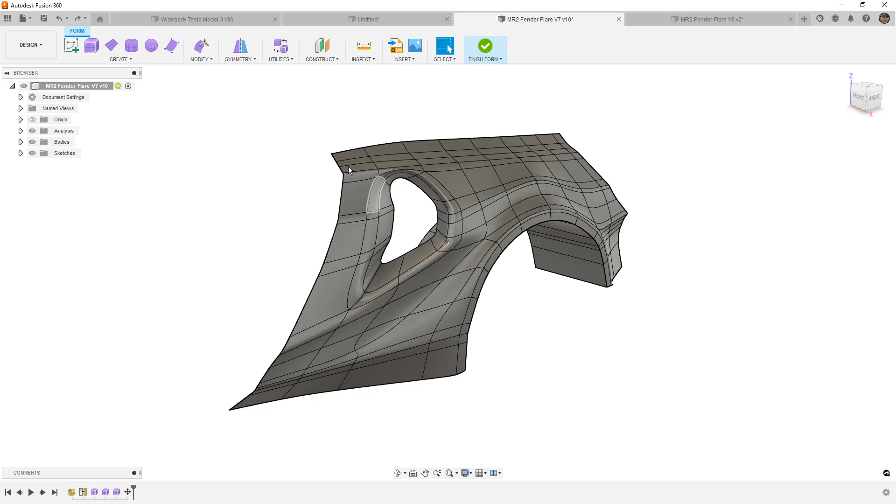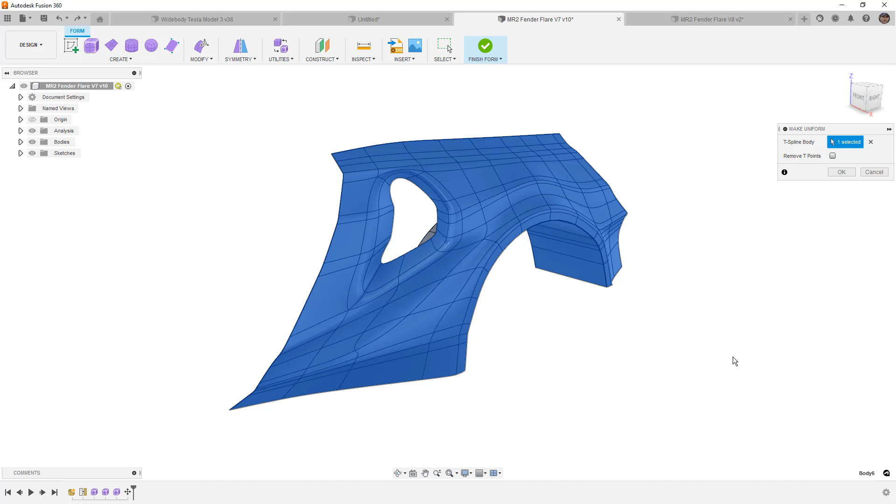Now, the Make Uniform tool, and again, we're going to be prompted to upgrade a T-spline body on all of your designs because there is new functionality. It's just how it goes with these designs. But with this T-spline functionality, when we use Make Uniform, it's taking our smooth body and it's trying to relax some of those areas where the edges are close together, and we might have additional tension in those areas. And what it does is it takes the smooth display and it makes it a little bit closer to our underlying box display. Now, I'm going to hit cancel on this just so we can take a quick look.

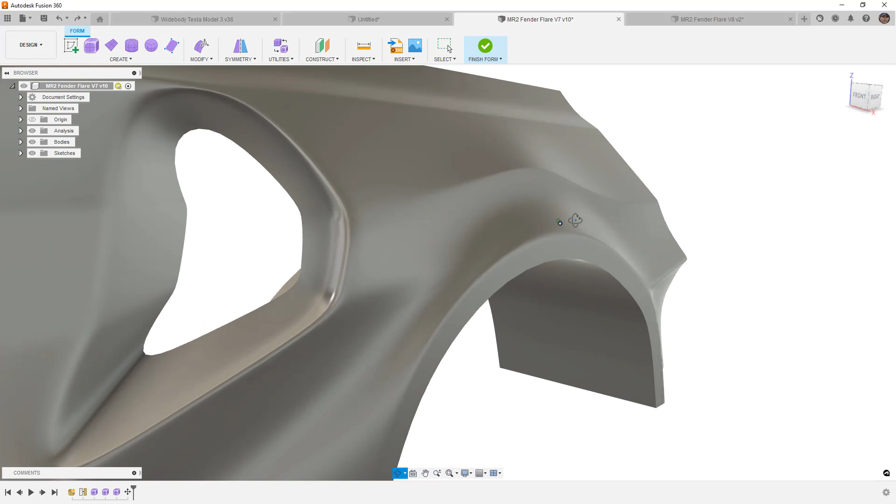When we take a look at the smooth display, you can see that these edges are relatively far apart. When we go into our box display, you can see they're closer together. Now, they're closer together because we're driving that edge. We want a crease in this design. It's not a hard crease, but we want that edge that we have in the design. When we use things like Make Uniform, what's going to happen is we're going to get this to relax a little bit.

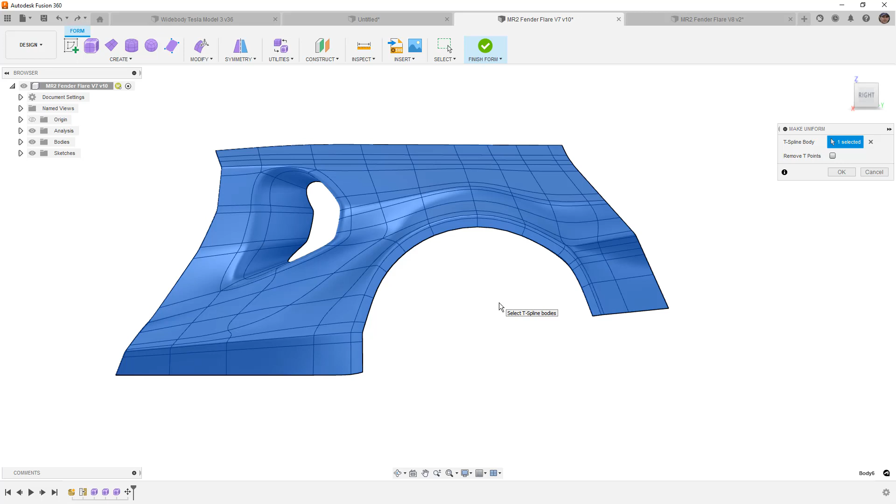Now, they added this remove T-points option in Make Uniform, and I'm not entirely sure that this is a good thing. And the reason for that is because most designs will have multiple T-points. Now, this design specifically only has one, and that was an intentional T-point because I wanted to help control the edge of this flare, but I also wanted to have this crease that sort of went away from that flare in the back. Now, the reason I don't necessarily think that this is a good thing is because it's all or nothing. If you have multiple T-points in a design, you are removing them all or you are leaving them all in the design. And I'll show you what that looks like here.

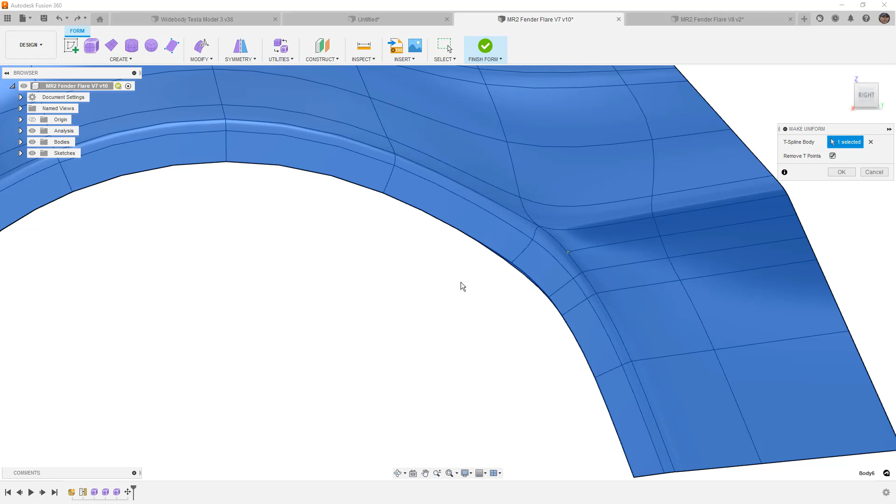So I'm going to use Control and 4 to hide my edges. And I want to note that we've got this flat fender lip, and then we've got this crease that sort of comes off, but it's almost fading away into it.

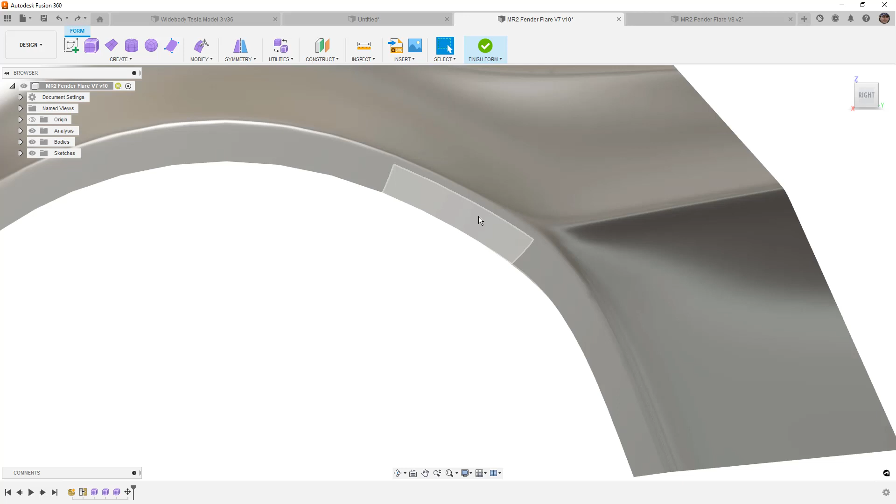When we take a look at this, what ends up happening is that T point gets converted to a star point, and that star point actually does change the way in which that geometry ends. What that means is that we can't really tell until we convert it, until we go through the process. The reason I don't necessarily think this is a good thing is because that functionality was already there in repair body.

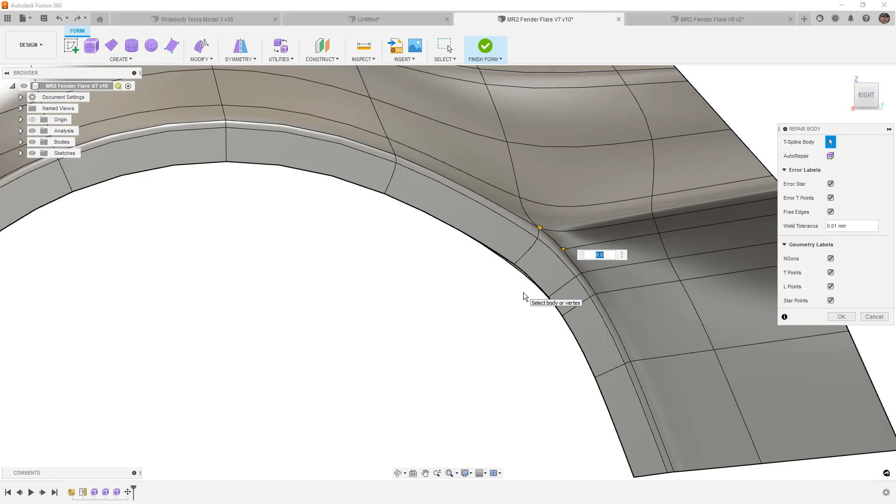If we use repair body, we have a T point here. We can click and turn it into a star point or turn it back into a T point. I think this is a better option because we can see the change in the design on the screen without having to go through the process of converting it.

So when it's a T point, you can see that this crease sort of disappears before it gets to this lip. When we convert it to a star point, it fades this edge away. So it's tight up here, it's tight down here, and it sort of disappears here.

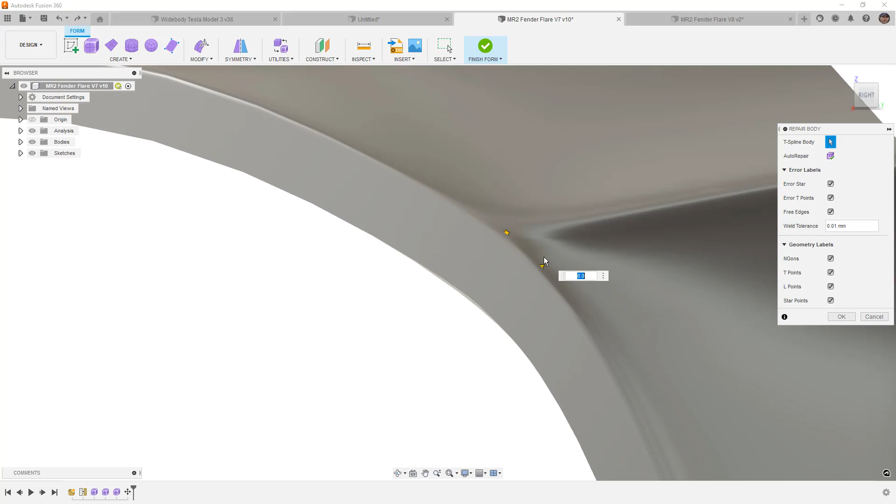Now if the design happened to have multiple T points on it, for example the fender that we did in the video series, if I go to repair body and take a look at these, again we have to convert it. It's just part of the process when we have new functionality. This design has two T points.

It's got one where this crease ends at this edge. Now this is actually a creased edge in this design. It doesn't have a smooth transition, but we also have the same thing underneath.

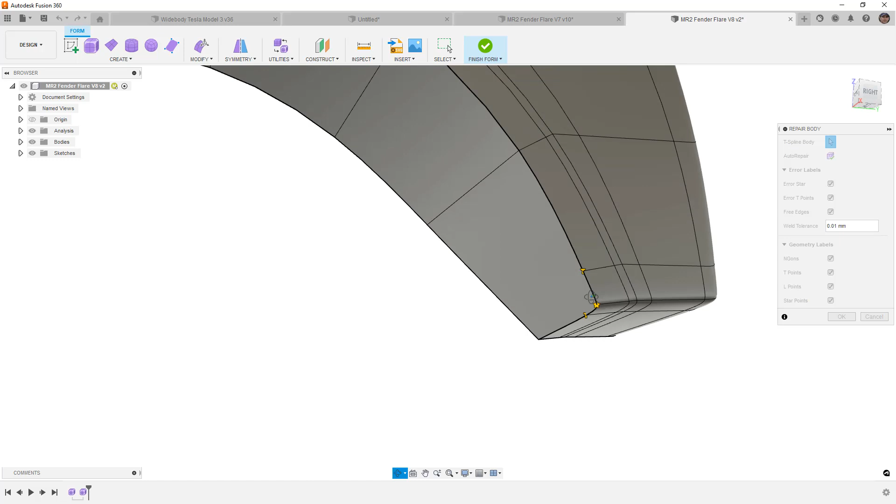Now if we click on each of these, it is going to have an effect on the overall design. That may be okay, that may not be okay. But if we're using the utilities make uniform, it is all or nothing with those T points. We're going to have to convert both of them.

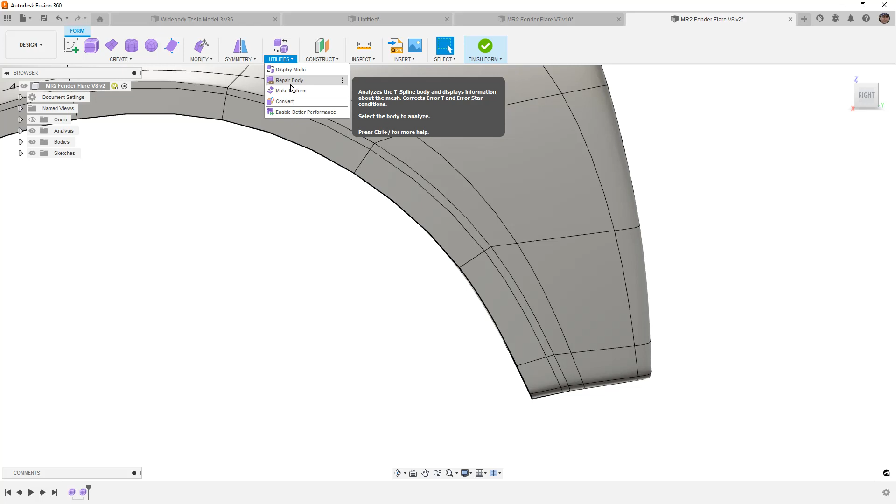Now it's not exactly a one-to-one thing. It's not identical using repair body and make uniform. The reason for that is because make uniform also relaxes the form a little bit. Remember, it's taking out some of that tension. So you don't actually get the exact same result through both tools. You'll have to play around with it and decide whether or not it works for you.

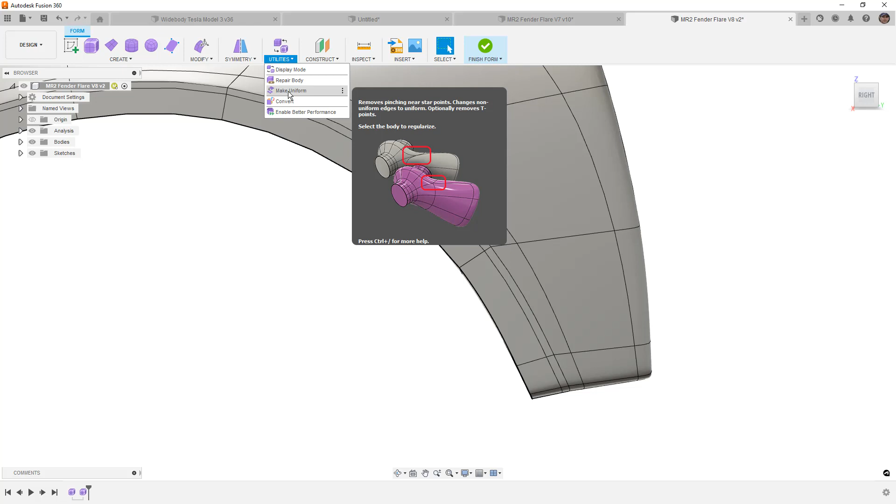The reason again that I don't like it is because it's all or nothing with the T points. You can keep all the T points, but you can't keep some of the T points.

Now that we've taken a look at what that is and what it does, let's talk about the mesh update. I have a mesh file open here that is over 10 million facets, 10 million faces. This is a pretty heavy mesh file to be working with inside of Fusion 360.

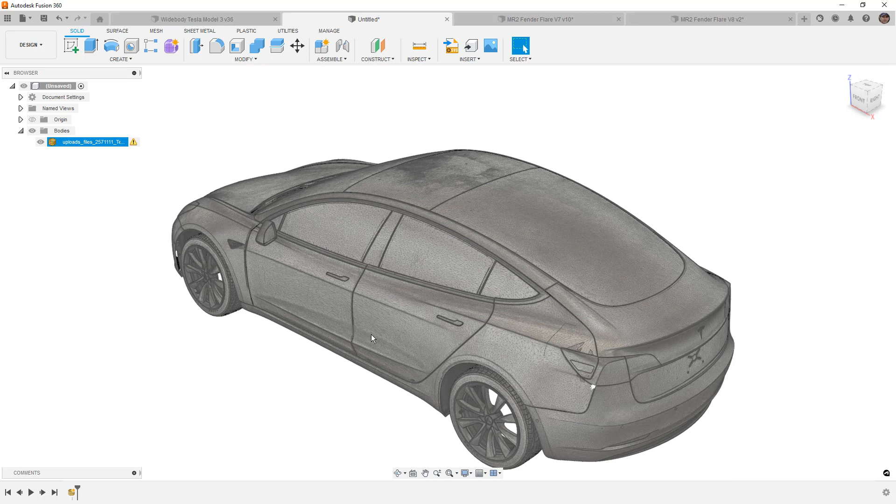Now I have not really noticed any performance difference with something like this. I zoom in, I zoom out, and it still sort of jumps around and is a bit buggy. I think there is going to be a limit to the mesh resolution or the number of mesh elements where we're really going to see a performance gain.

I don't have some supercomputer here with a high-end graphics card. I really have what I would consider a bare bones CAD workstation with a relatively low-end CAD graphics card, simply because I don't feel that you need it when working with Fusion 360. It doesn't really take a lot of the multi-core, multi-threading processes, and it doesn't really rely heavily on a high-end graphics card.

Obviously if you're using Inventor or SolidWorks, or doing a lot in things like Blender, that's a different story. But in Fusion 360, I really don't think there's a big need for high-end hardware, so I don't have it on the system I make these videos with. With that said, there is a slight performance difference, but it's not mind-boggling.

So if you're struggling bringing car models or fender models into Fusion 360, I don't think this is going to make a drastic difference for you. I would like to hear in the comments if you do see a performance jump from yesterday to today, if you are now able to work with these mesh files a little bit easier.

For me, with these large mesh files, I haven't seen a drastic difference to where I would have even noticed if I hadn't read it on the blog. That's not to say there aren't performance gains in other areas, especially when dealing with large assemblies or solving joints. But on the mesh side of things, I haven't seen a big difference.